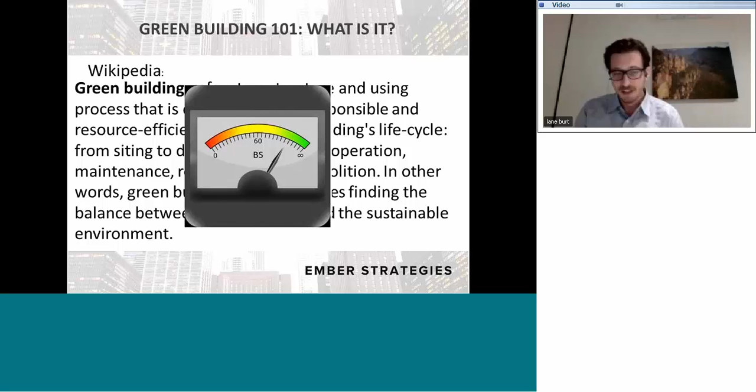And I will just say that, if you have to say in other words in your definition, you're probably not doing a good job of defining that thing. And if you have a BS meter, that's probably going off right now. So maybe the second one here, maybe it does a better job.

This is from Wiktionary. It says, a building designed to be ecologically correct by using resources efficiently, using internal recycling, renewable energy sources, recyclable or biodegradable construction materials, blending in with the local environment, particularly in out-of-town locations. The aims are to reduce to a minimum the environmental impact and to take human health factors into consideration.

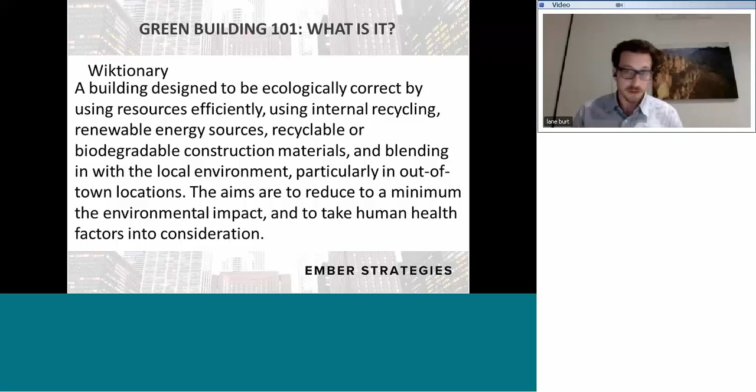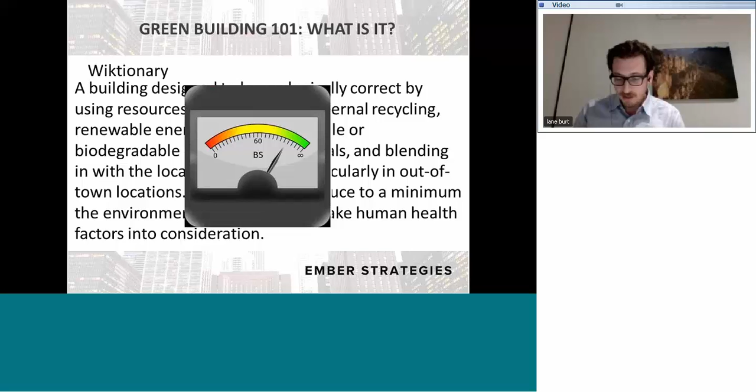I will say that is better, but that still is a lot of synonyms and buzzwords for green put in front of synonyms for building. Maybe not the most clarifying concept for defining what a green building is. So that was the case when people decided they wanted to have green building certification. That was the problem. It was a hard to define concept. Everyone kind of wanted one.

And if you've got something that people want and it's hard to define, there's a certain type of person who will pop up to try to sell you one. And these were kind of snake oil salesmen. So if there's a need out there like that, then it seems that some sort of real system would be demanded by the industry, and that was kind of what happened.

Green building certification systems arose from the need to try and define, in practice, a hard-to-define concept and to provide the best in the building, design, and construction industry with an ability to prove it. So with a real definition and a real system, you can make statements and you can stand by them.

And if you're one of the more advanced practitioners in building design and construction industry, you feel like you can design and build green buildings. You want to be able to back those claims up. You don't want everyone to be able to say that, yes, this is green. Of course it's a green building.

And the certification angle comes because if you want to be able to say those things and to prove it, you need some verifier, some credible third party that can make what you say hold water, to make it have weight. So if that was the problem and that was the need, what does the building design and construction industry want from green building certification today, and are they getting it?

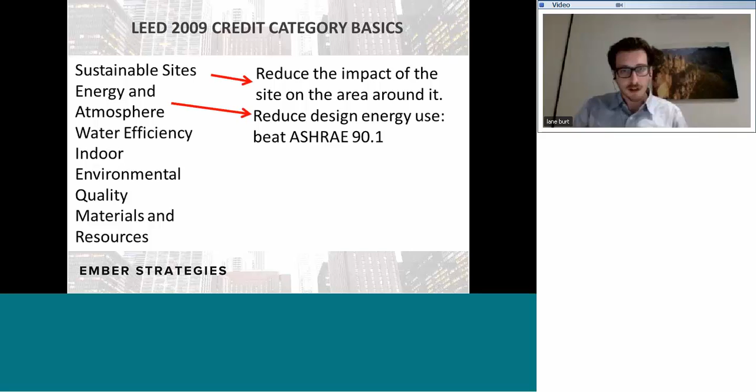So sustainable sites is a collection of things that you're asked to do, with the theory being that you're reducing the impact of the site on the area around it. Energy and atmosphere is all about energy efficiency and to a lesser extent, refrigerant management and renewable energy. But to get a lot of those credits, you just beat the energy code. In most places, that energy code is ASHRAE 90.1, and you beat it by as much as possible. For water efficiency, very much the same concept. You minimize indoor and outdoor water use, and you beat the benchmark by as much as you can.

For indoor environmental quality, this is a collection of pretty varied credits, but the idea is that you design around the people in the building, which means that you ventilate, you give them control, you make them comfortable, you think about the lighting and the mechanical systems and how they impact that environmental quality. And finally, just to drastically oversimplify materials and resources, you're trying to use as much of the best stuff on the market as possible, and you're trying to look at the total amount of materials in the site and how much of the best stuff you've used.

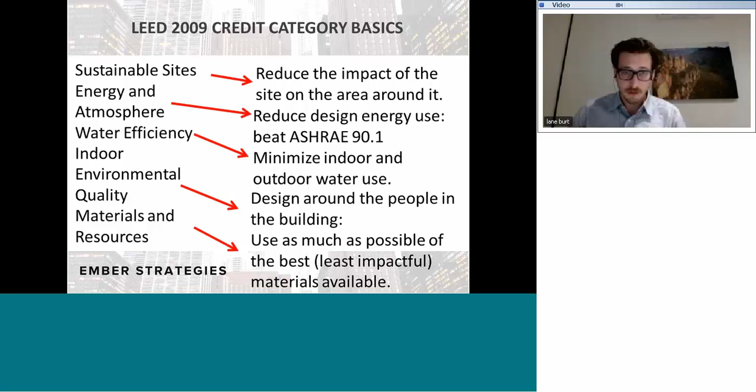So now to shift a little bit and get a little bit more in depth on V4, since that's the new system and the system that people will increasingly need to become familiar with, because, like I said, it's out now. Buildings have been certified under V4, but you can still use 2009 up until the end of 2016, or at least October. One note: you saw that growth. That means the system's gotten a lot more popular. That also means that the development of the rating system has a lot more participants. So when you've got more cooks in the kitchen, it's much more difficult to get the food on the plate. And it's quite impressive that now this system has gotten through that process and is out and available for use. It's met the definition of consensus.

So what does it say? Well, the scorecard, if you were to look at it side by side with the old scorecard and the old points, you'd see some changes, but generally it would look very similar. Excuse me. There's been a lot of reorganizing and combining and some introduction of new stuff, along with asking people to do a bit more. One of the first changes is this integrative process credit, which you see up at the top, and I'll talk more about what an integrated process is in a bit. But if you do it, you get a point, and that doesn't really apply to any particular category.

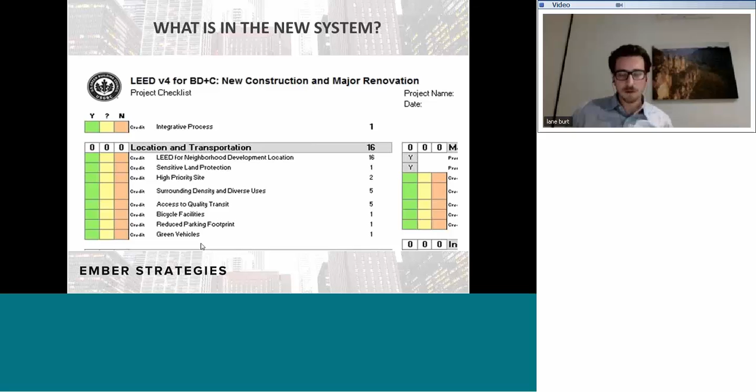The site category has been split up into location and transportation, as well as sustainable sites, and that's just to give it more clarity and to have a greater priority on the location and transportation aspects. The types of things you're asked to do there are take care of the land on the site that happens to be sensitive, or you get credit if you're building on a high priority site. It looks at the density of the area around you in terms of buildings and the amount of people, and makes sure that you're matching it. It talks about access to transit and bicycle facilities, reducing your parking footprint, and encouraging the use of green vehicles. And in each one of these credits, there's different requirements and different pieces of documentation that you're asked to produce.

In the sustainable sites category, it's similar to what it was previously, where it's about your impact on the site while you're building. So that means that you're protecting or restoring habitat, that you're preserving open space to the extent that there is some and there's a need for some, you're managing the rainwater, your impact on the heat island, and the light pollution that you're generating.

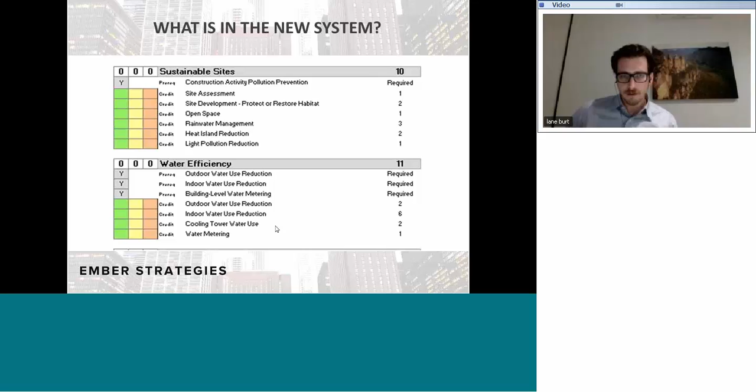Water efficiency is still fairly straightforward, like I was saying. You minimize your indoor and outdoor water use, which is pretty simple if you spend the time to think about it at the design phase. But there's also now more points for using better water meters and more water meters at different levels of the building. And for the first time, cooling tower water use is considered. If you spend some effort minimizing that, you can get credit.

The energy and atmosphere credit is still fundamentally about energy efficiency. Beat the energy code by as much as you can. But there's also points for commissioning, for more metering, for participating in demand response programs, and then to the extent that you have green power, which means renewable energy, solar on site, or sometimes biogas and other technologies, your percent of your power that you generate gets you credit, and you can purchase green power from your utility as another avenue.

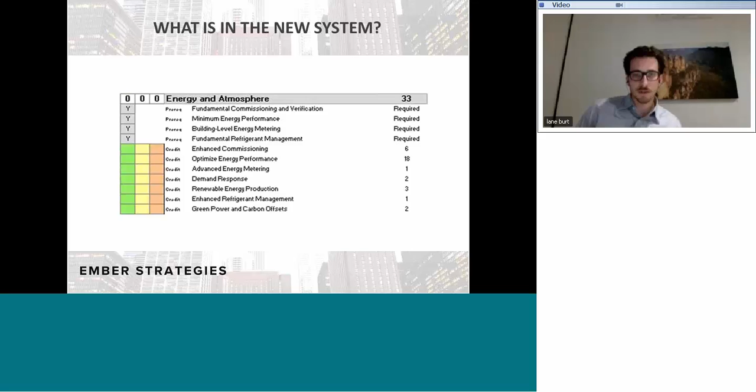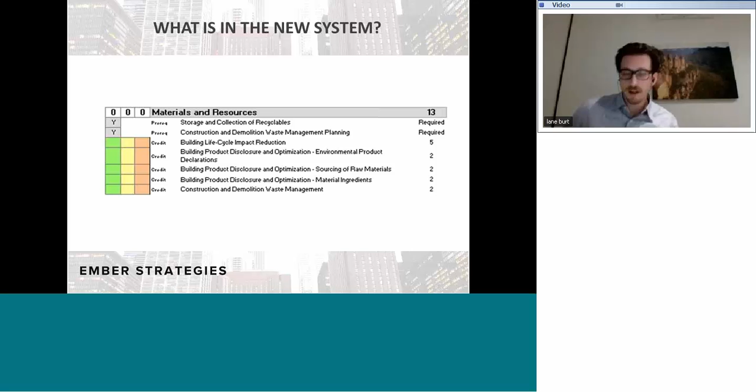Within materials, like I said, it's use as much of the best stuff on the market. In the new rating system, there's just different definitions for what is the best stuff and how to calculate that. Also managing your construction demolition waste and minimizing that to the extent that you can, keeping things out of landfills.

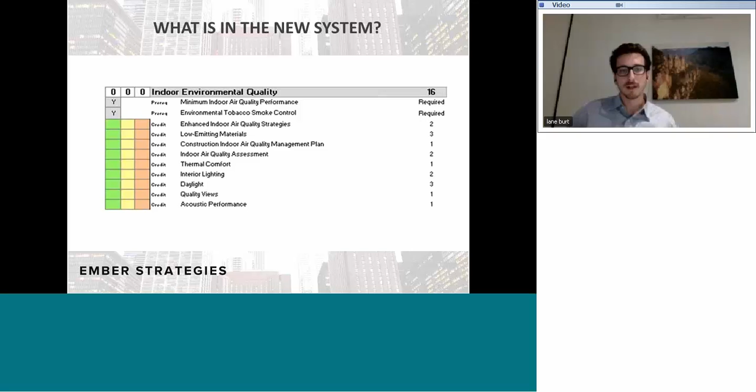Indoor environmental quality, the types of things they ask for. Like I mentioned, you've got to ventilate at least to a minimum, but the more that you do on ventilation, thermal comfort, control, daylighting and views, and the interior lighting control and acoustic performance, the more you can do to make the building a pleasant place to live or work, the more points you're going to get.

And that's 100 to that point. There still are the 10 wild cards, the innovation points, and then the regional priority points. So the tiers that I showed you, the certified, silver, gold, platinum, that's all still the same.

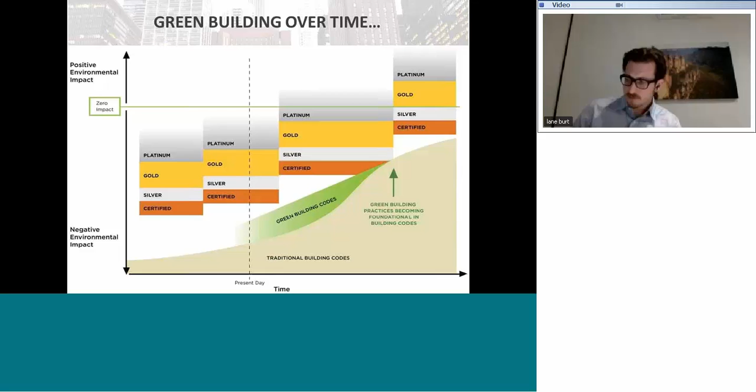So now I'm going to shift gears and talk about working with LEED and being on a LEED project team and what makes them successful. But first, I want to reemphasize the intent question that I highlighted at the very beginning.

If you remember the intent of the rating system, of the credit, and really of the certification itself, it will help you prepare and minimize surprises. The rating system is targeting among the best projects in the world. Remember, each credit is meant to be a meaningful step above standard practice. It's not supposed to be the same thing that is done on every project.

And remember, you are going to be asked to prove it. So keep more records when you're in a LEED project. This is going to be reviewed and certified, and it's easier just to keep that in mind the entire time and not be surprised.

So say you're working on a LEED project and you're part of a project team, say at the design phase, but also could be at the construction phase. You're either working with the architects or the engineers, or you're working with the contractors and subcontractors. What do successful project teams tend to do?

Well, the ones that do well tend to start early. They say at the very beginning of the project, this is going to be a LEED project, and therefore we know we're going to be going above and beyond, and we're going to communicate. We're going to make sure these things get done.

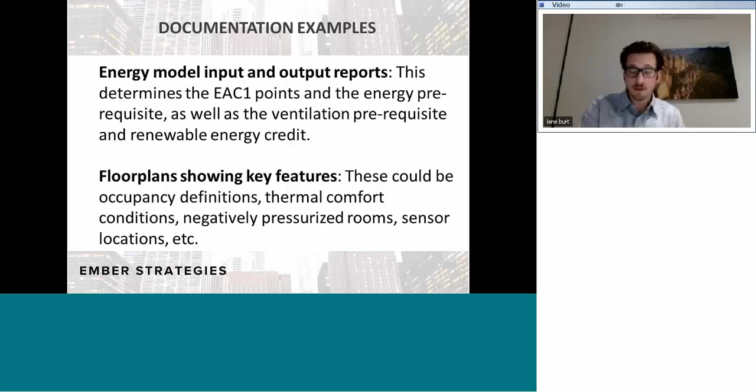Sometimes you need your submittal docs. So you say the material is compliant. They're not going to go check on the site, but if they want to, okay, what did you put in? So here's what we spec'd, and it meets the intent of the credit.

Unfortunately, there are some specialized spreadsheets that you do have to do, which is additional time, additional work, and those are often in the forms themselves. You have to put in, say, this air handler or this rooftop unit, and what zones it serves, what rooms it serves, and sometimes how much air, what are the set points. So you just can't get away from some of that.

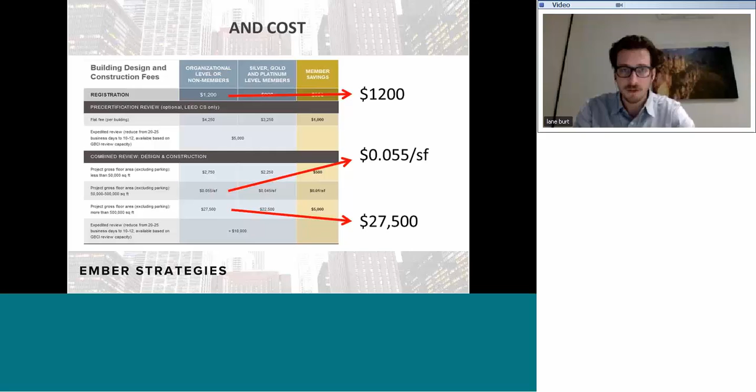So I highlight these because in the context of a big building project, these are not big numbers. These are rounding errors. But that's not necessarily what people talk about when they're talking about costs of green building. These are just the registration and certification costs. The real costs associated with green building are in the time that's required, the additional design or engineering or construction effort to actually achieve what the credit asked you to achieve, and potentially that separate LEED consultant that I mentioned.

These costs can be significant, but they're highly dependent on the project strategy for achieving LEED and how familiar members of the team are with what they'll be asked to do. So the cost tends to go down with the learning curve. And there are some buildings out there that do LEED at no additional cost.

Which credits you choose to pursue can also have a cost consideration. The two that are talked about the most are the energy efficiency credit, which is a lot of points. It might require extra engineering, but if your engineering team is good at it, maybe it won't. But the modeling and documentation, if you weren't planning to do it before, is an additional cost. Now, of course, you might get energy savings over the life of the building as a result of more efficient design, and you should take that into consideration.

Another credit that has additional costs is the commissioning credits, which if you weren't planning to do them are just an extra cost, but that's an investment to make sure that the building owner gets what they paid for and that the building is turned over operating as it was designed to operate and doesn't have systems that are just improper and not ready to be part of the building.

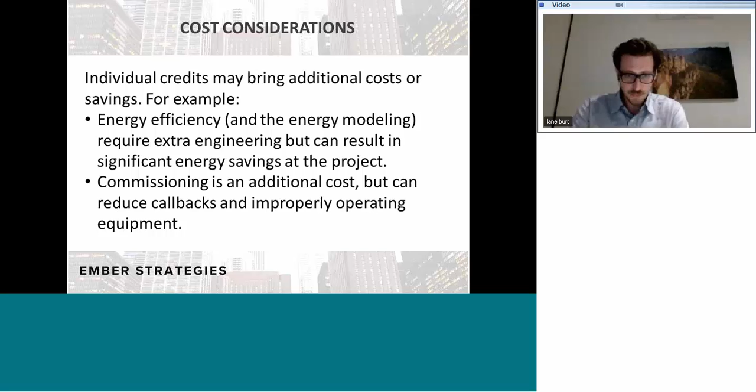So if that's what you do on a project team, and that's what a LEED building is, and that's how a LEED building is defined, and you've done all this work, and now you've got the certification, why did you do that? Why do you want that? And I think it's helpful to think about LEED certifications, especially for design and construction, like degrees.

Once you get that plaque, it's just like when you get that degree. It's a helpful analogy. It does actually hold up on several levels. If you're a student and you get a degree, you back up your claim to be confident in the fundamentals of what you studied. If you're a building and you claim to be green and you have a certification, being green is your curriculum, and you can back up your claims. Potentially, you could even graduate with honors, which would be a higher level certification, gold or platinum.

Just because you get a degree and you go out into the job market, you're not guaranteed the job, but you have a competitive advantage in finding one because you have that degree. That's pretty similar for a building coming out of design and construction to get the certificate of occupancy. That job is like a sale to a new owner, or potentially leasing up the building to tenants and moving to the money-making part of the building life cycle. So the buildings that have the certifications might have a competitive advantage in doing those things.

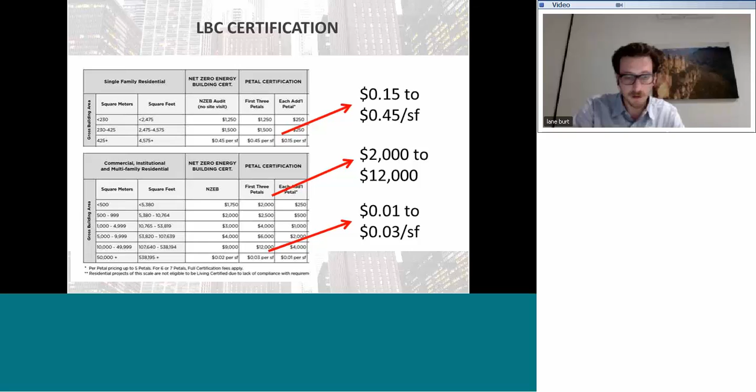The other thing I want to mention to draw back to the LEED discussion, LEED is meant to be consensus-based. Most people agree this is a green building. Living building is not meant to be consensus-based. This is the ultimate end goal. This is the very smart people in green building saying this is where we want to go and rolling out a very, very tall challenge and seeing who can reach that bar, really letting the designers and engineers and contractors really stretch.

So probably the most impressive thing about living buildings is that they are real. There are some out there. This is the most recent data that I could find from the Living Future Institute. They are quantifying the number of projects at around 192, 5.3 million square feet, and you can see yes, that's increasing over time. That's what the lines mean. But where are they? Well, most of them are on the west coast of the U.S. and Canada, but you can see a scattering around both the Midwest and Mountain West and the East Coast as well. And it's not just in the U.S. and Canada, but there's some decent amount of living buildings in Australia, New Zealand, some in China, some in India, and a few in Europe.

Most of those buildings, by physical buildings, 27% are single or multifamily residential, 27% are mixed use, and 30% are education. In terms of square footage, over 50% are mixed use, about 20% are education, and about 10%, I think it's actually 11%, are commercial. So you can kind of get a sense of what is happening in these buildings. These aren't the big tall office buildings necessarily.

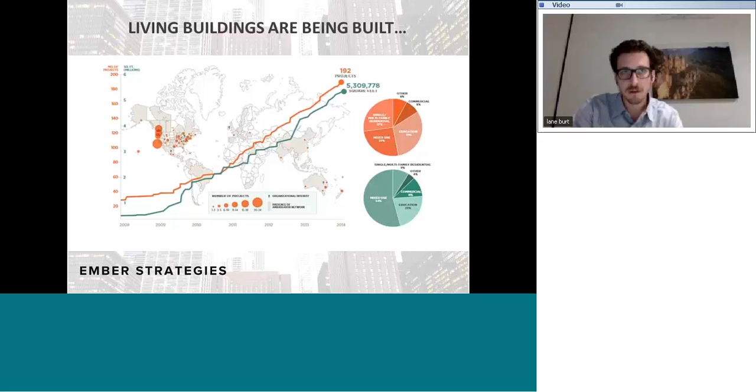So I wanted to highlight one actual building. This is the Bullitt Center. It's in Seattle, Washington. I haven't been able to go and see it, but I would like to. I'm going to find some excuse. It's going for a living building. It's the home of the Bullitt Foundation, which is an environmental foundation. They are in their performance period now, and they are 80% leased.

So I could talk a bit about this building. It's incredibly impressive. It has positive net energy generation. It has positive water use, and probably most interestingly, it has its own digestive system. There's a series of connected composting toilets throughout a traditional office space, and the building actually digests and processes all its waste on the site. That big solar roof you see on the top provides shade to the open park area that's in the front of it.

So if it works, we have a short 2.5-minute video on this, and now would be the time if we can get it pulled up. Okay, so last time we actually got stuck a little bit. So just for safety reasons, because we're close to the end of the time, I'm going to take any questions from any groups. We'll take questions again after the video if we still have time. So, Mark, how's your group doing? Do they have questions for Lane?

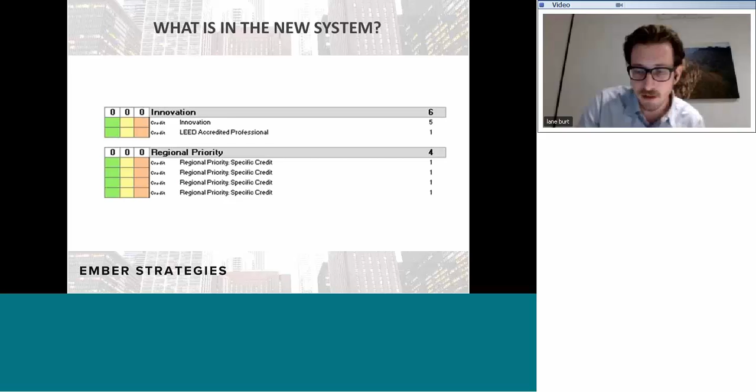My closing thoughts: I definitely encourage you to go to both livingfuture.org and usgbc.org and actually look through the rating systems, especially the Living Building Challenge. Just reading through them really helps change the way you think about what you're asked to do on a building project. And there are additional resources out there. I've mentioned LEED User, usgbc.org and livingfuture.org. There are more, but those are the places to start.

To close, I have to point out that this is something to be proud of if you work in the building industry. There aren't many industries out there that take on challenges this big on their own. The building industry isn't being told it has to do this. It's saying it is going to do this, and it's going to figure out how to do it in a voluntary and market-based way. I think that's something we can be happy about.